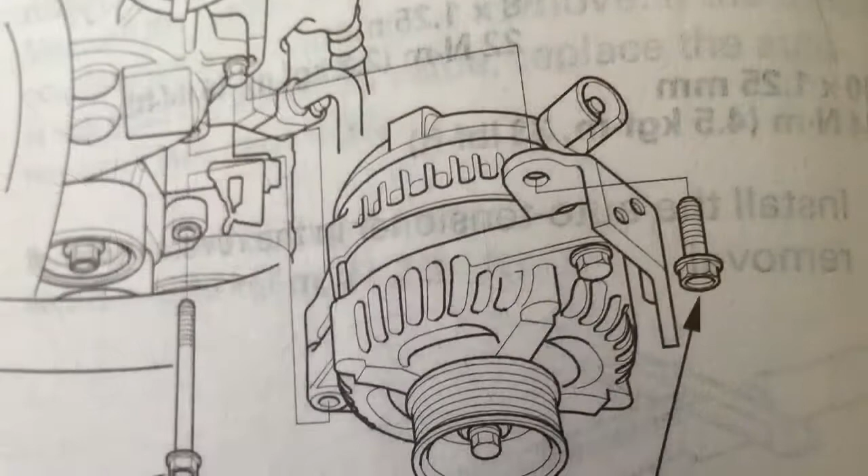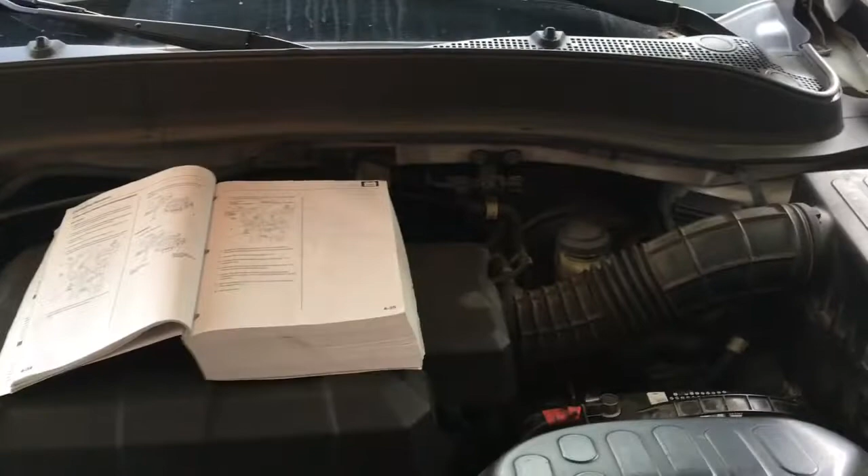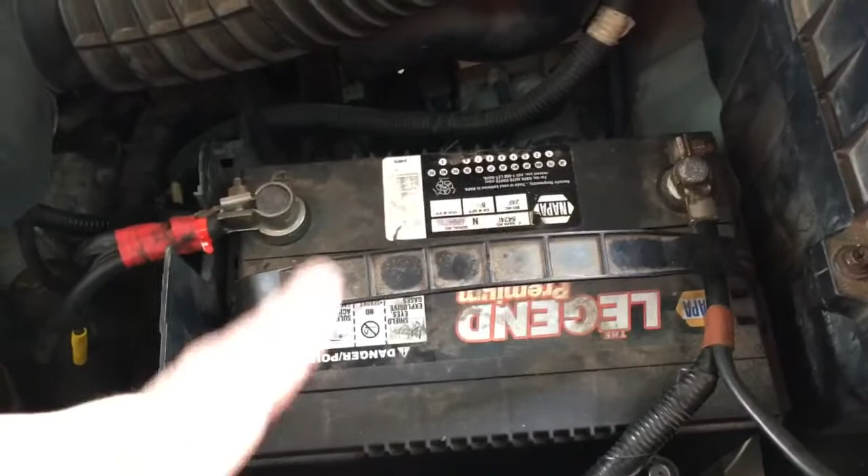Okay, I am going to change the alternator on my 2006 Honda Ridgeline. First thing I'm going to do is disconnect the battery. Actually, I'm going to pull this battery right out.

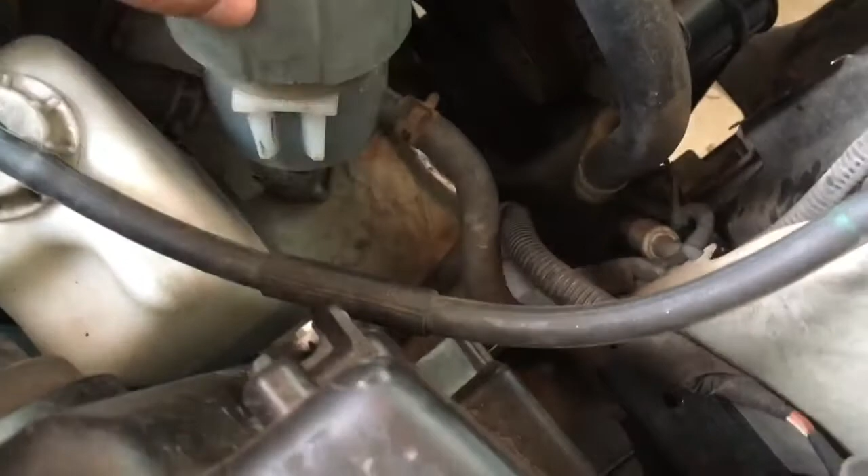The night before, I put some penetrating fluid on the nuts we need to loosen. We're going to take this nut off to loosen this so we can move the AC line out of the way. Then we've got the power steering reservoir. There's a plastic track thing that slides right off that piece of metal down there. You want to pry it with a little regular screwdriver, pry the clip out, and then pull up.

Other thing we got to do after we get the cables and stuff out of the way is the tensioner pulley right here. That's a size 14 metric. Put your socket on there with a breaker bar, or a piece of pipe on the end of your ratchet, and push towards the cabin of the truck, and that'll release the tension on the belt, because you have to take the belt off the alternator to remove it.

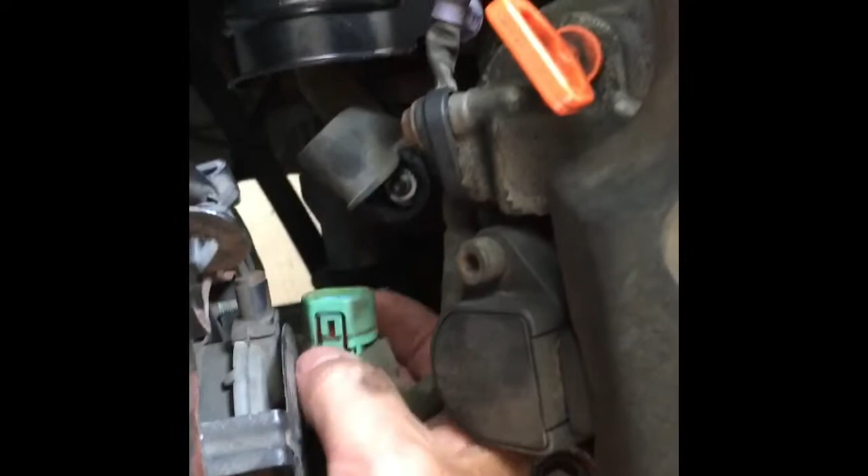There's a little rubber boot you got to pull up here. That's the cable running into your alternator, and that's also a size 12 metric. Then you have this rubber boot here, you got to pull that back, and there's a little clip you got to push to release that. Don't just yank it off.

Then you have the two bolts that hold the alternator on after you get the bracket and stuff off. There's one here, and then there's one underneath, and we'll be taking those off as well.

By the way, this 2006 service manual from Honda is a pretty awesome thing to have. The previous owner of the truck bought it and had this whole big file of everything he changed on the vehicle. That also helped me deduce that it was the alternator.

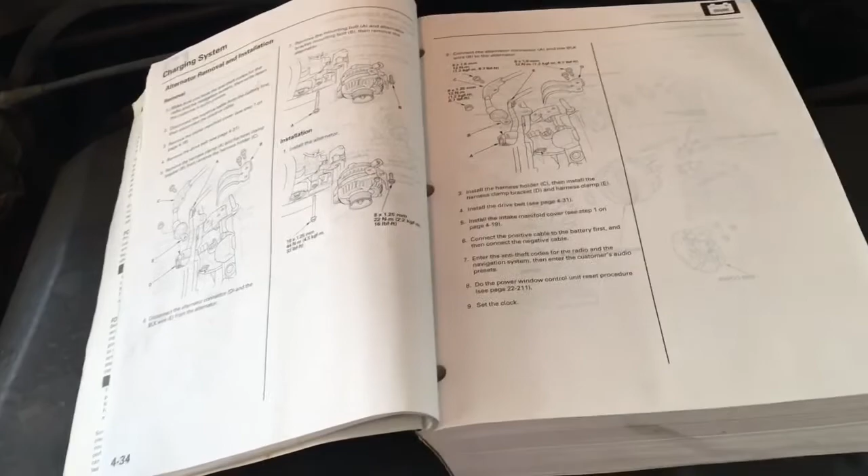I put a multimeter on the battery, and when you run the vehicle and turn the headlights on, you can see that it pulls charge from the battery, so it's below 12 when the truck is running. That implies that the alternator is not giving juice to the battery to charge it.

Either way, the truck would need to be towed, because the battery is not going to give it enough power to get to the garage.

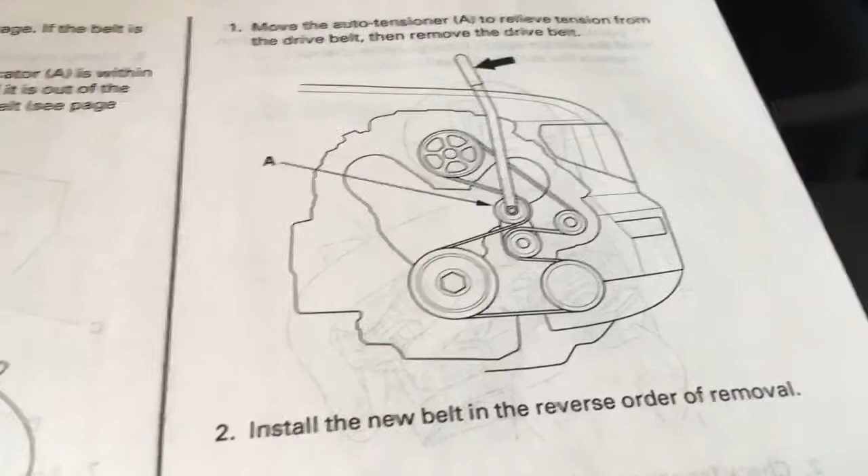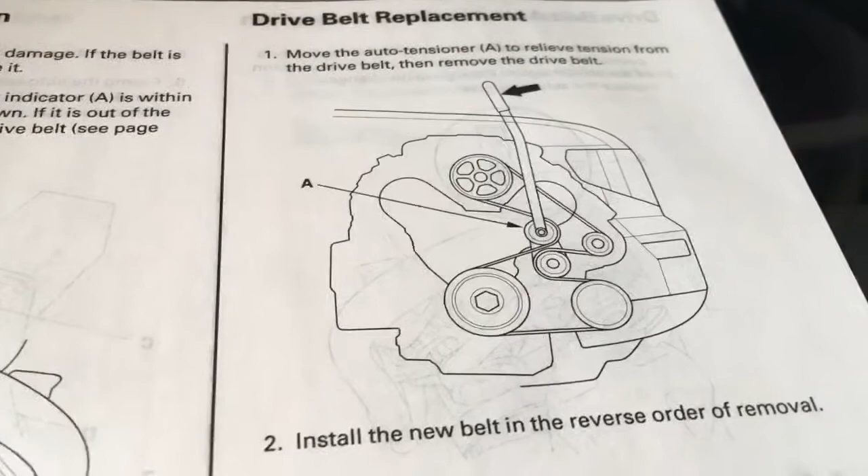So let's get started. Okay, there is the drive belt diagram for when we release the tension on the drive belt, and you can see the one with the bar on it. That is your breaker bar, that's not actually attached to your vehicle. That's the pulley you're going to loosen, and you're going to push that towards the cab of the truck.

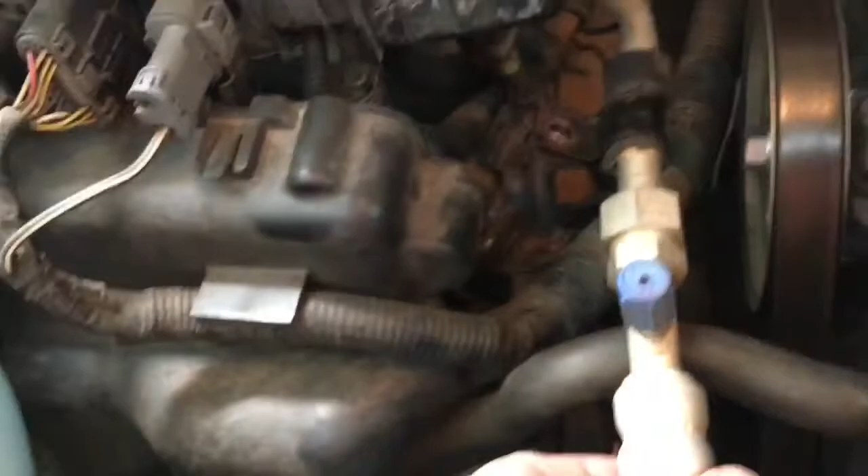Okay, I took this bolt off right here so I could move that around. That was a number 10 bolt. I got my socket on the tension relief pulley, and I got this piece of pipe on there to use as my ghetto breaker bar, I guess. I just pushed it towards the cab of the truck, and the belt came right off the alternator pretty easy.

Now we're going to take these two bolts off the alternator bracket. Those are number 10 metrics. Okay, bracket removed, just put it off to the side. I don't think it'll be in my way. Maybe I'll take it off from the cable, but for now it's right there.

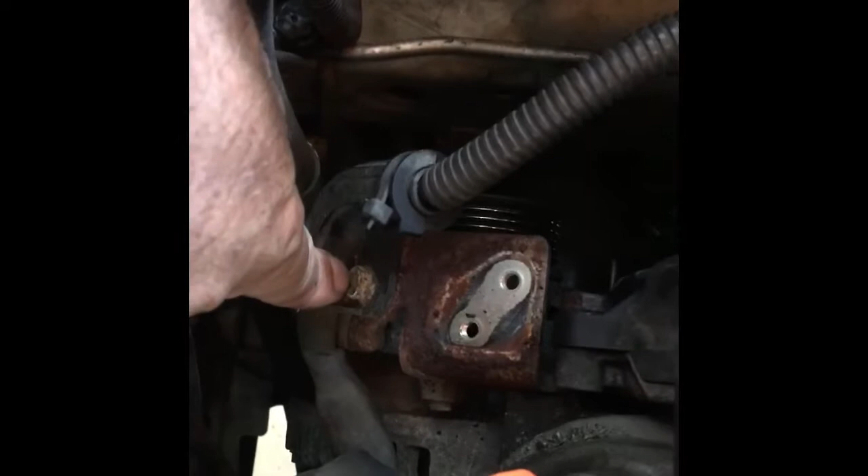Now we got to take this bolt off, it's also a 10 millimeter. What I did with the nuts, since they were a little bit rusty, is I tapped the socket on there with a hammer so they wouldn't slip off and strip the head of the bolt. This bolt is off the alternator bracket.

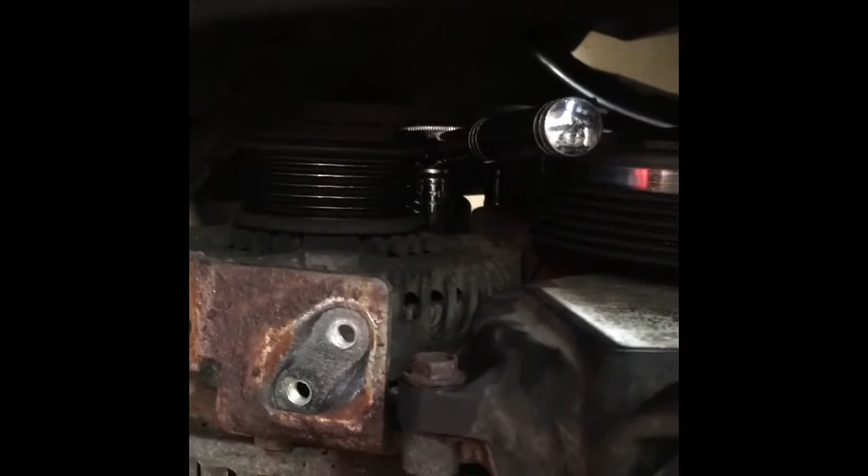Now to get the cable that's on the alternator, got to pull that rubber boot back, and that's a number 12 metric. Now we got to put a 14 millimeter socket on the bottom bolt that holds the alternator on, this bolt right here. It's on there pretty good, so I got to use the black pipe gun on my ratchet, and that seems to be working, but it took a bit to break it free.

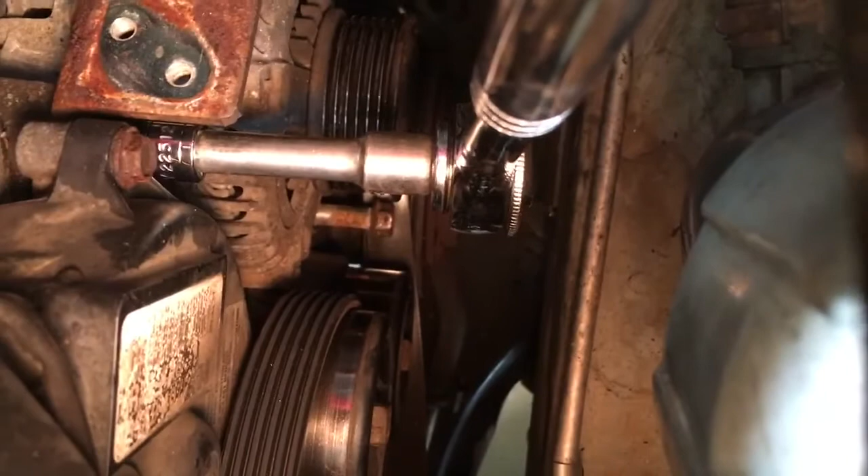With that bottom bolt loosened all the way up, I don't think it's going to pull out all the way until I pull the alternator out. So I'm going to do the top bolt that holds the alternator with the number 12 metric. We're going to be taking this bolt off right here. See, now my hands are dirty. Alright, number 12 metric. Okay, she's out.

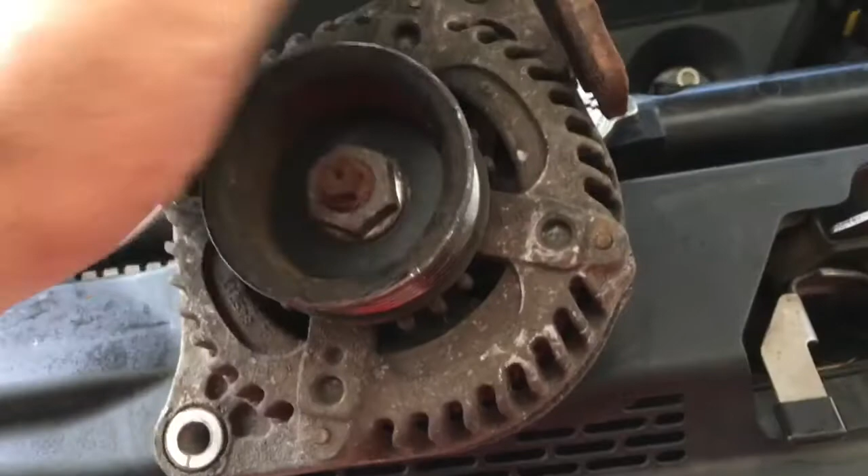Now I got to take this bolt off so I can put that bracket on the new alternator. Hardest part was this bottom bolt, and then like I suspected, you had to take this one off to wiggle the alternator to get that bolt out. It's just weight and friction holding it in at that point. Pulling the alternator out of its home was a task, but you just push this stuff back and it'll come out.

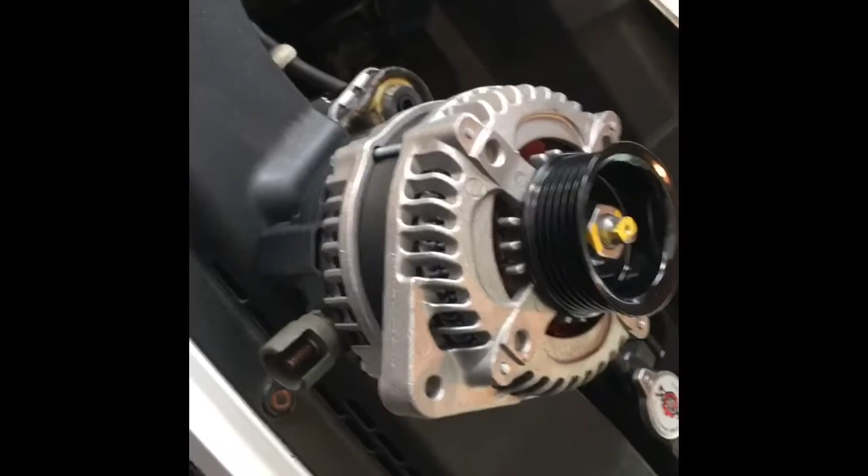Okay, there's the new alternator, all shiny, ready to go in. I picked it up at AutoZone for 200 bucks.

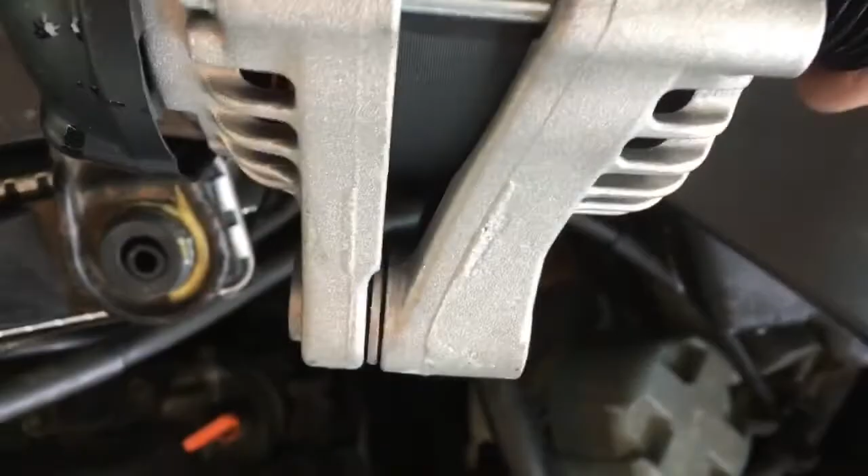Just going back in there. I put some anti-seize on the old bolt, so she should thread in nice and easy. Okay, this part right here needs to slide into here. When I put it in there, it didn't want to slide in, so I put a C-clamp on here and tightened it up, and it smushed this into each other a little bit, so it should slide in right now.

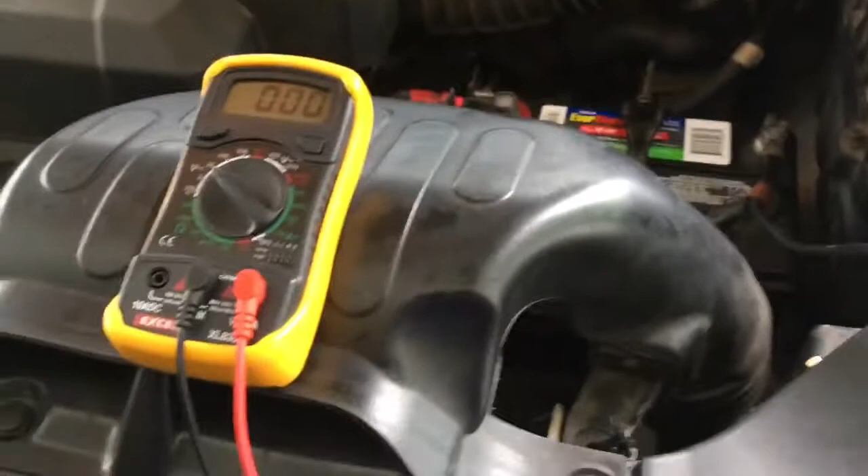Okay, truck is running, new alternator is in. See if I can do this with one hand. Yep, almost 14. The alternator is charging the battery. Prior to the new alternator, it was a little 11.8.